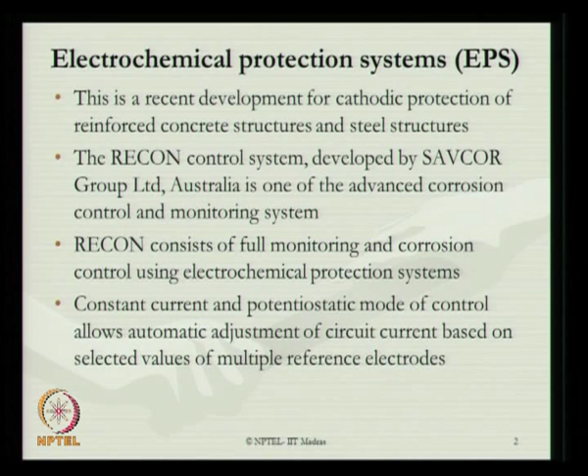In this methodology, a constant current and potentiostatic mode of control allows automatic adjustment of circuit current based on selected values of multiple reference electrodes.

EPS can also be employed for corrosion protection of new reinforced concrete structures. Chloride induced corrosion is one of the major causes of concrete deterioration in reinforced concrete structures in marine environment. EPS is a recent method found to be effective in addressing these problems, with a proactive approach to address such durability issues.

EPS components of a fresh construction shall include activated titanium anodes, monitoring probes and sensors, and high durability anode and steel connections. Now the fundamental question is: when does corrosion occur in a reinforced concrete system or in a steel structure?

In particular, when you talk about reinforced concrete structures, the reinforcement embedded in concrete is initially protected from corrosion by a passive layer formed around them. This layer is formed essentially due to the high alkaline nature of concrete. Corrosion occurs when this passive layer is destroyed or perforated.

Many surveys are to be carried out to actually assess the condition of concrete in marine environment. Following are the list of surveys which are generally carried out to assess the condition of concrete:

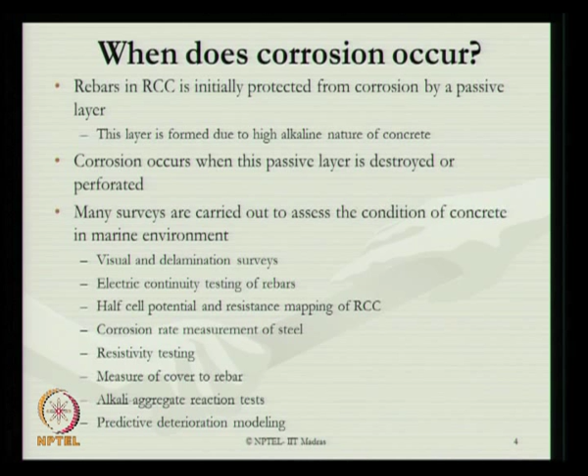Visual and delamination survey, electric continuity testing of rebars, half cell potential tests and resistance mapping of reinforced concrete structures, corrosion rate measurement of steel, resistivity testing, measurement of cover to the rebar, alkali aggregate reaction tests, and predictive deterioration modeling. These are some of the experimental and analytical tools generally carried out for assessing the condition of concrete structures in marine environment.

Now the fundamental question comes: corrosion will be activated once the passive layer is destructed or perforated. Now how to restore the natural realkalization of concrete?

New concrete has a natural inherent alkalinity, which offers passive protection to the rebar. When this passive protection is destructed or destroyed, ingression of carbon dioxide creates carbonated concrete of very low alkalinity. This results in loss of the passive layer and also accelerates corrosion of the reinforced bar in concrete.

Realkalization is one of the famous and common non-destructive methods to counteract concrete carbonation. This involves an electrochemical technique of passing a sustained low voltage current between temporary anodes on the surface of concrete over a short period of time, ranging anywhere from 3 days to 15 days, and this experiment can be repeated in a number of cycles over a given period.

A paste of cellulose fibers saturated in sodium carbonate solution is generally used as an electrolyte covering the concrete surface. As surface anodes are embedded in this alkali, the alkali is drawn into the concrete and reaches the rebars. This realkalizes the concrete in totality, and a natural protective passive layer is then formed, which offers protection against corrosion to the rebar.

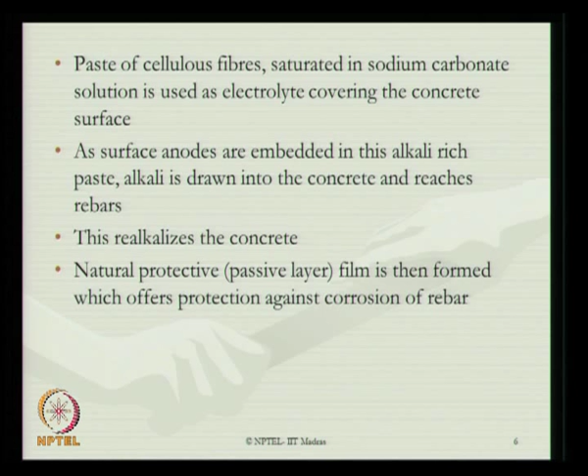Let us quickly see what is the methodology by which this can be applied. Before you apply the realkalization technique to any reinforced concrete system, the following inspections are to be carried out.

One should carry out visual inspection, depth of carbonation to be ascertained, chloride analysis test to be carried out, and cover to rebars to be assessed very carefully. One has to conduct a delamination survey to understand the integrity of concrete in situ, and should also study alkali aggregate reaction through experimental investigations before realkalization is attempted in concrete structures.

The rebar connections are installed in the concrete by connecting cables. These cables are generally black in color and are extended to a transformer rectifier circuit outside. The continuity of the rebar is to be ascertained and checked before this test is conducted.

Anode connections are then made. Red cables are connected to the anode and also extended to the same transformer rectifier unit. A reservoir is used to house the anode mesh and the alkaline electrolyte.

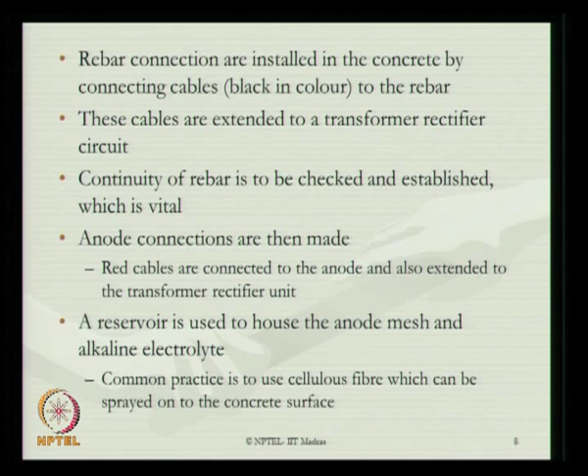The common practice is to use cellulose fiber, which can be sprayed on the concrete surface, which will act as an electrolyte medium.

Wooden battens are then fixed to the concrete surface, which act as spacers between the concrete and the anode mesh. The anode mesh is then fixed to these battens, and the cellulose fiber is sprayed on the mesh.

Regular wetting of the fiber can also be done, as an alkaline electrolyte is to be ensured. Cables from the rebar, which we call cathode, generally black in color, and the mesh, which we call anode, generally red in color, are connected respectively to the negative and positive poles of the transformer rectifier unit to supply the design current intensity.

During the test period, if required, the concrete surface can be rewetted after switching off the power, if you see the electrolyte is getting dried off because of weather conditions.

The whole arrangement is then subsequently monitored during the test period by means of current and voltage readings. The pH levels of the concrete are also periodically inspected and tested.

Cables are then disconnected after the test period is over and the concrete is cleaned with water. Now the concrete is completely realkalized and the passive layer will be formed, so that corrosion on the rebar will not occur further.

This test and procedure is to be repeated at constant intervals, maybe at a cycle of 3 to 6 months gap, depending upon the marine environment where the jetties or structures are placed.

Before we look into other kinds of systems, let us talk about rehabilitation in more detail, in terms of how to compute the reaction of corrosion time or initiation of corrosion from the equations.

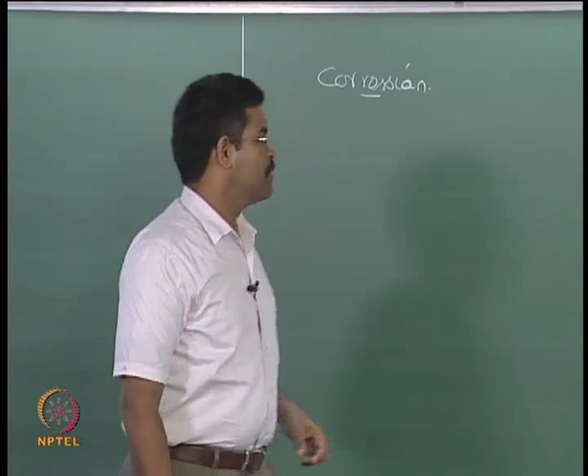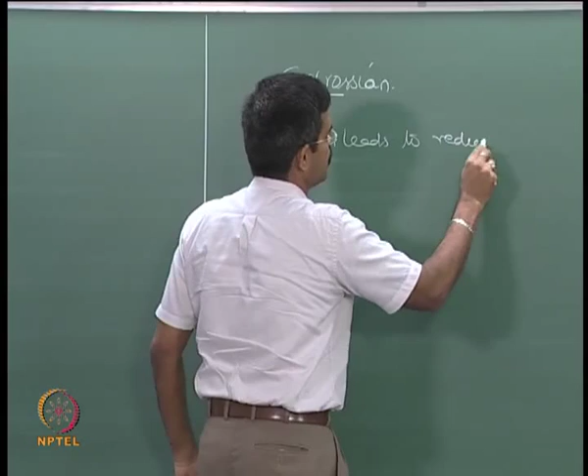So ladies and gentlemen, we will talk about corrosion as a quick process. Corrosion actually leads to reduction of cross sectional area of the rebar.

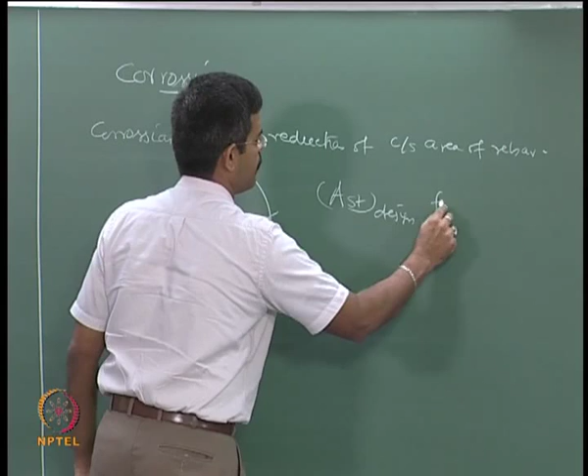For example, in the design I have got area of steel whose diameter is d, and of course I have got the design value of Ast, for example, as 2400 mm square. So depending upon the diameter of the bar, I will get n number of bars to be placed in position to take care of the design loads. It can be axial, it can be bending, etc.

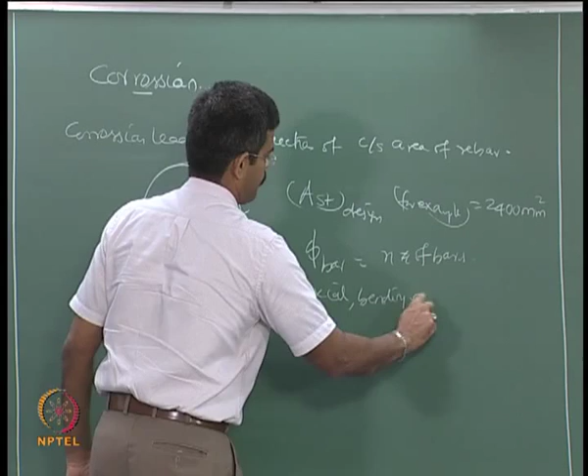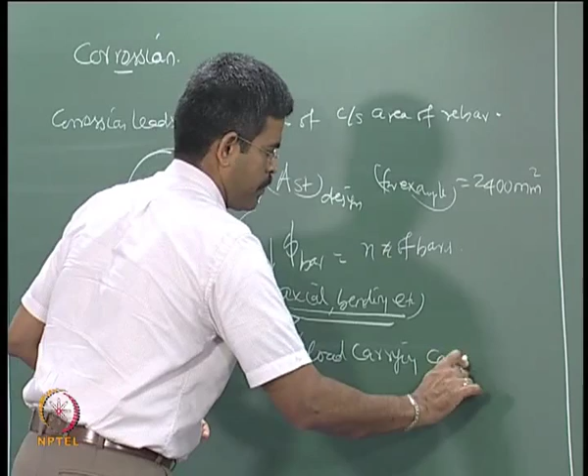On reduction of this diameter of the bar because of corrosion, there is reduction in area of steel, which will directly affect the load carrying capacity of the structure. It means the structure will be weakened, or the load carrying capacity will be reduced.

So, to improve the load carrying capacity, I have got to rehabilitate or repair or restore the member or the structure.

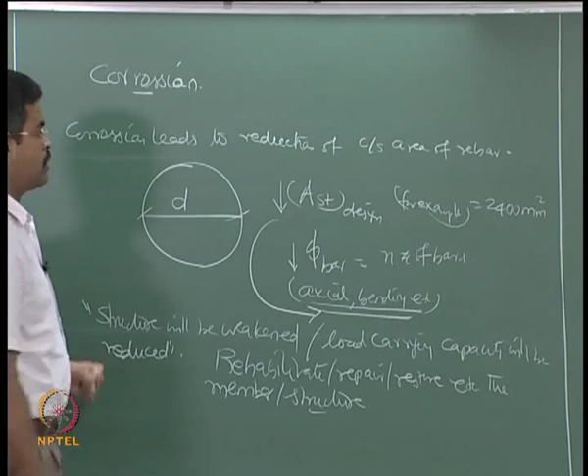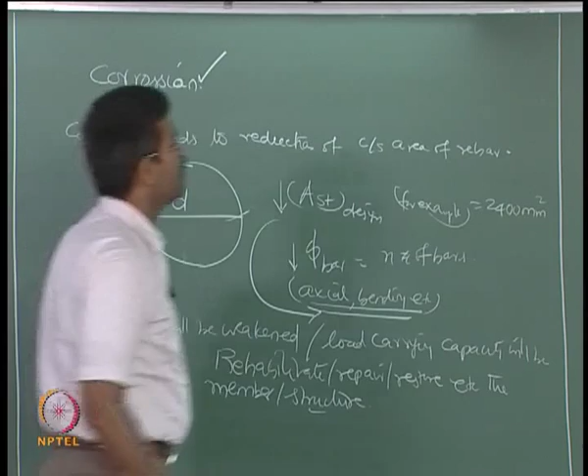Now, let us quickly understand what is the primary reason of reduction of diameter of the bar because of corrosion. If you look at the deterioration process as a whole, it depends on many factors, as you see at the bottom.

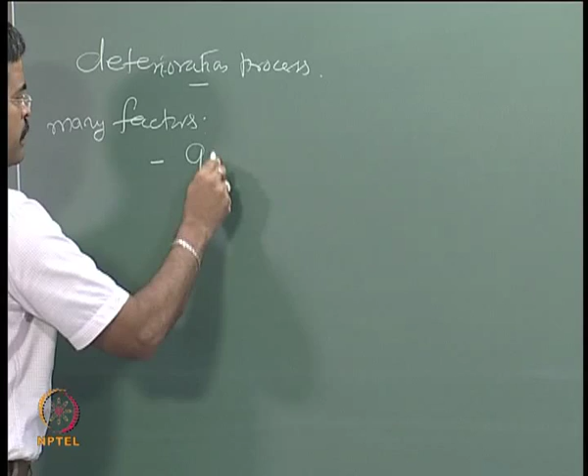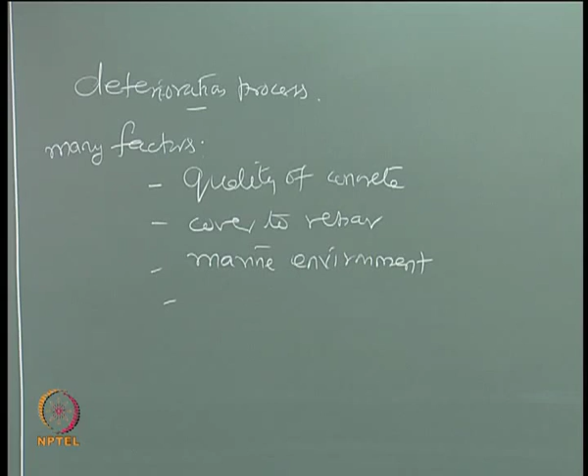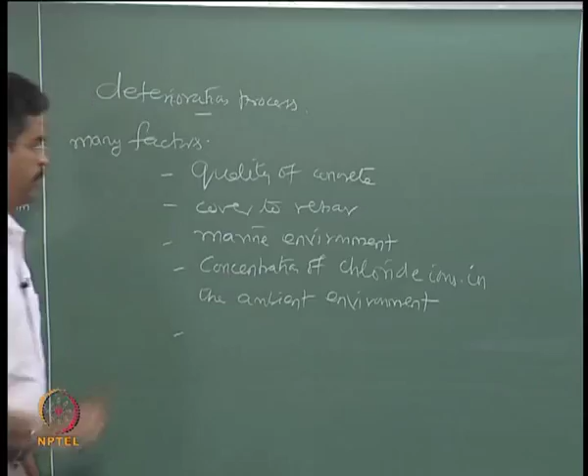These factors include quality of concrete, cover to the rebar, marine environment, concentration of chloride ions in the ambient environment, temperature and humidity, and of course the rate of corrosion of the rebar.

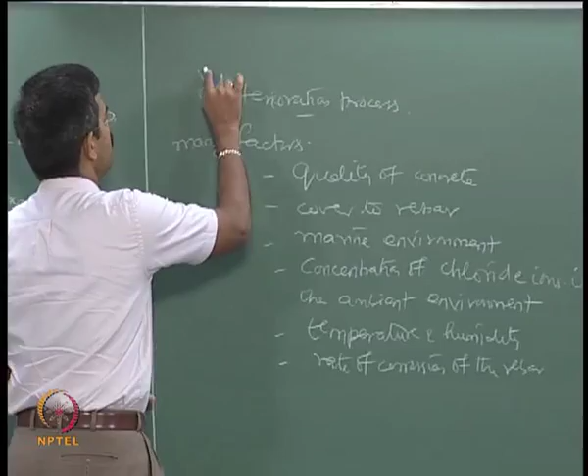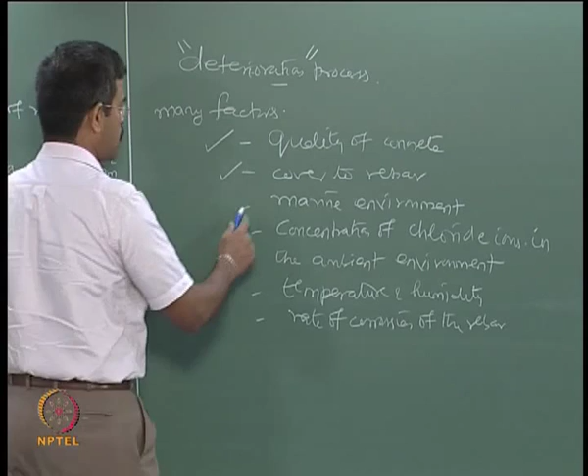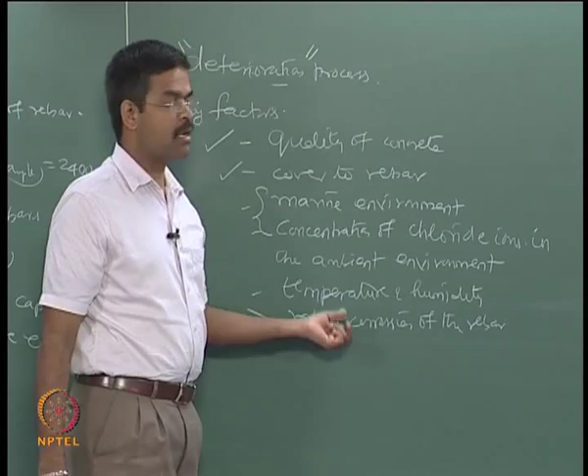Looking at all these factors which contribute to the quality deterioration of the member or structure, one can easily control the quality of concrete by proper inspection and placing of concrete. One can ensure from proper construction methodology that the cover to rebar is maintained as per design requirements, and one can address marine environment and chloride concentration through external protection methodologies. The rate of corrosion, however, becomes one of the important parameters directly related to the deterioration mechanism of the member or concrete structures.

So, let us talk about how to estimate the rate of corrosion quickly using values available in the literature.

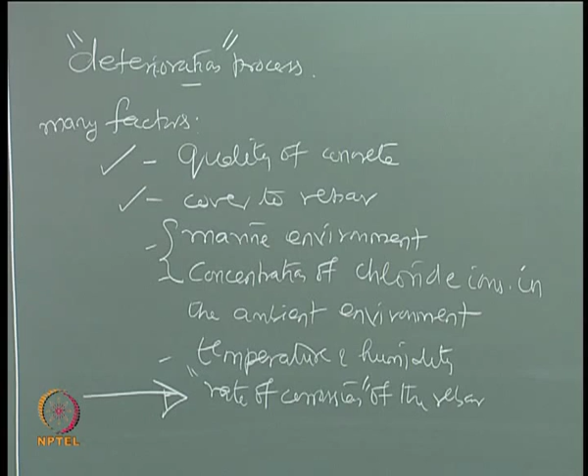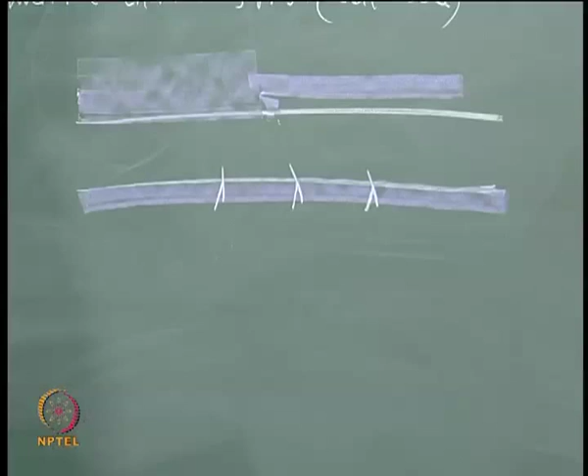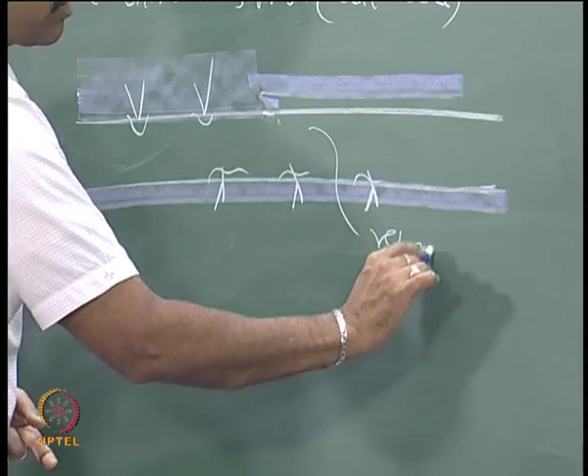As we understand, corrosion in reinforcement is essentially caused by breakage of the passive layer, which is formed when the concrete is fresh and alkaline. When this passive layer is broken or perforated, and not continuous, let's say this is my rebar and this is my passive layer. Whenever there are cracks or perforations in the passive layer because of carbon dioxide ingression etc., these are the locations where the rebar will start getting corroded. As a result, there is a net effective reduction in the diameter of the bar, which affects the load carrying capacity of the whole member.

There have been detailed studies conducted by Professor Amlan Sengupta and Professor Devdas Menon in the Civil Engineering Department, IIT Madras. I am going to give a glimpse of the approach these people carried out to estimate empirically how corrosion rate can be calculated.

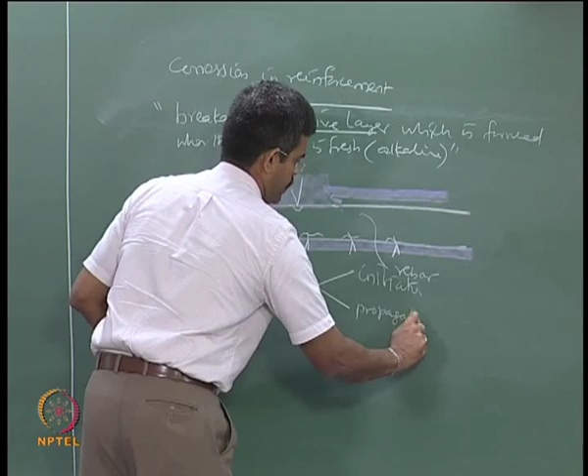Corrosion rate, or rate of corrosion, has got two processes: one is called initiation, the other is called propagation. Let us talk about corrosion initiation. Corrosion initiation depends on many parameters.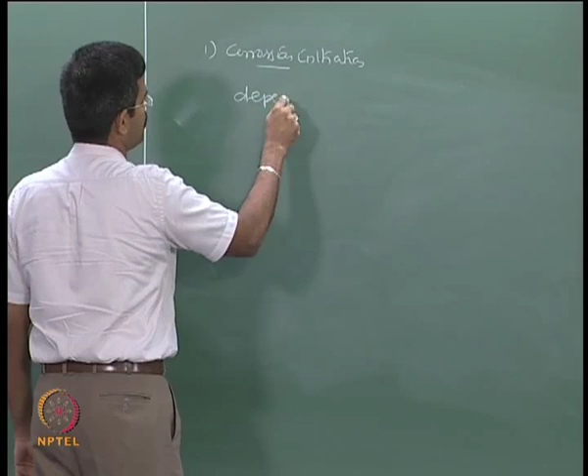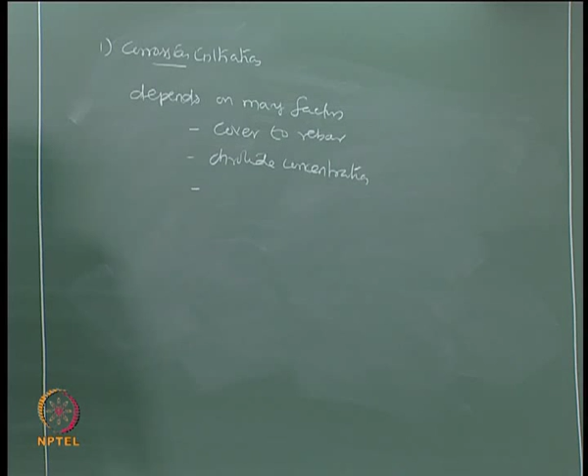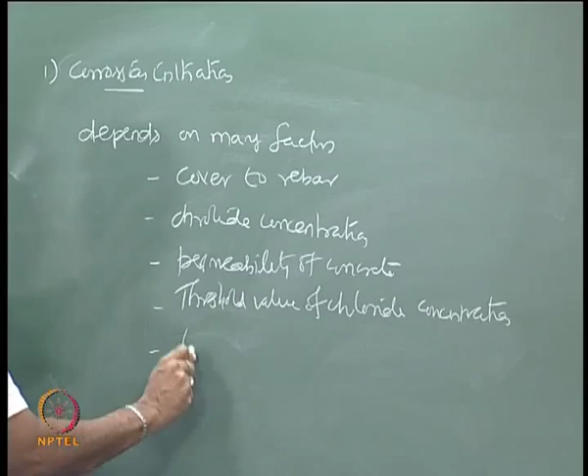These parameters include cover to rebar, chloride concentration, permeability, threshold value of chloride concentration, temperature, and relative humidity of concrete in marine environment. So there are many factors which affect or contribute to the initiation process of corrosion.

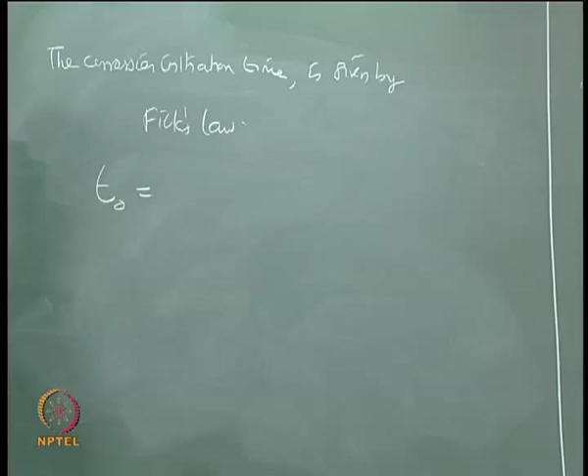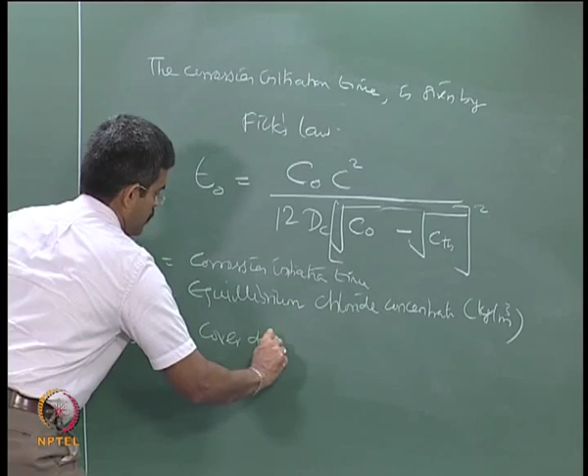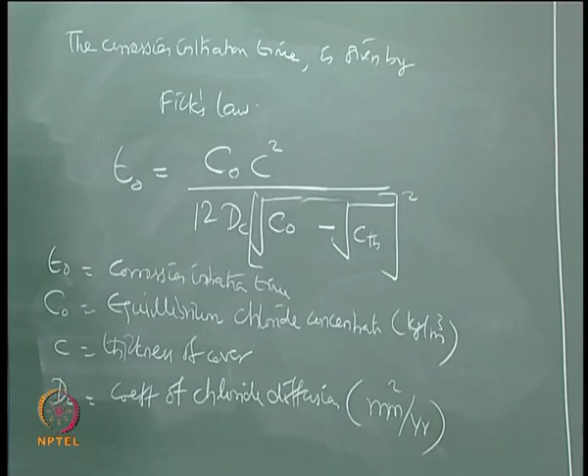The corrosion initiation time is given by Fick's law, which says T naught equals C naught, C square, 12 dc, square root of C naught minus square root of C threshold value, where T0 indicates the corrosion initiation time, C naught indicates equilibrium chloride concentration given in kg per cubic meter, C is the cover depth or thickness of cover, C is thickness of cover, Dc is the coefficient of chloride diffusion given in millimeter square per year, and Cth is the threshold value.

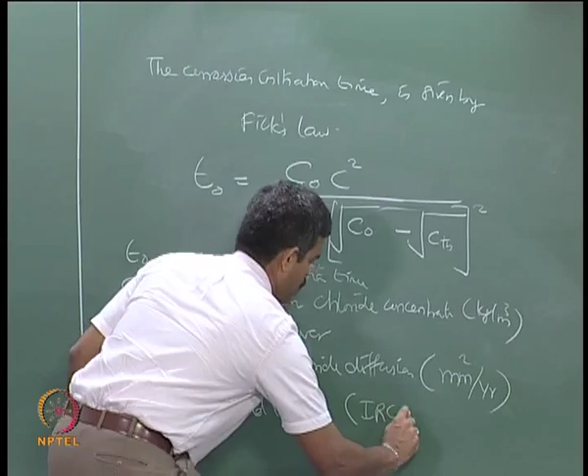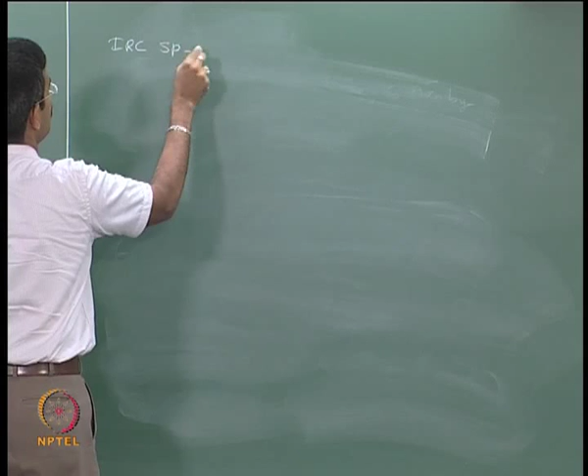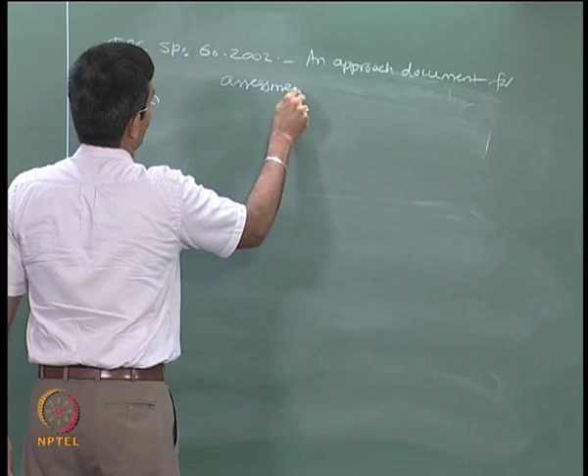The reference can be seen from IRC SP 60 2002 — it is an approach document for assessment of remaining life of concrete bridges, published by the Indian Road Congress, India.

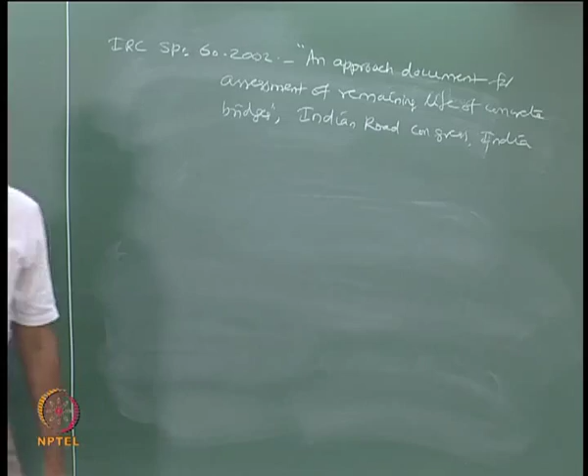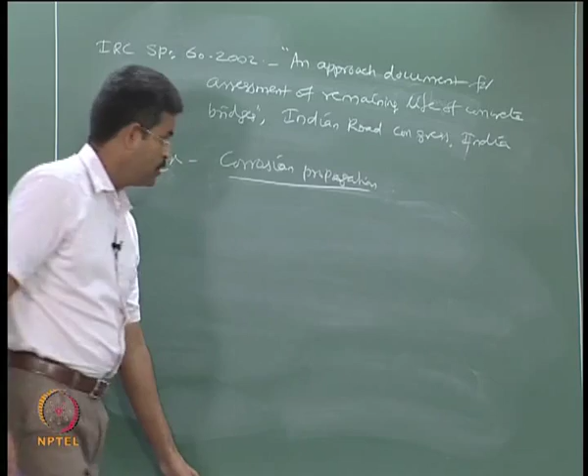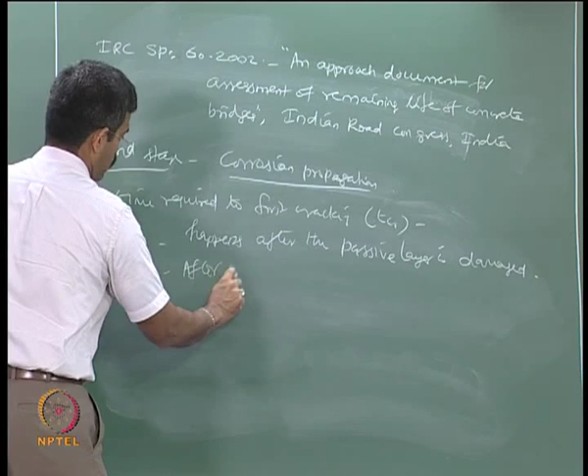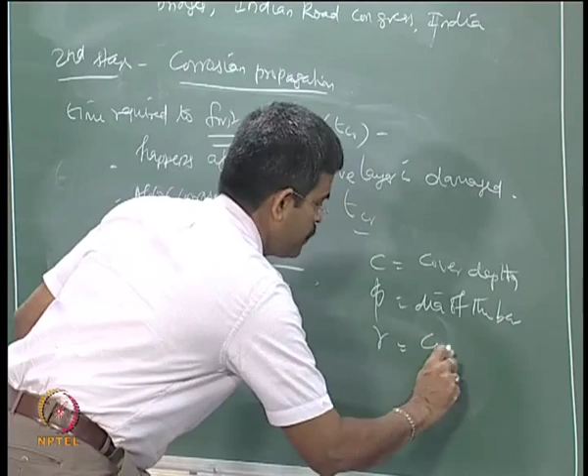The second stage is what we call corrosion propagation. The time required to first cracking, which we call TCR, generally happens after the passive layer is damaged, that is after corrosion is initiated. What would be the time at which the first crack would occur? This can be given by an equation where C is the cover depth, phi is the diameter of the bar, and R is the corrosion rate in uncracked concrete.

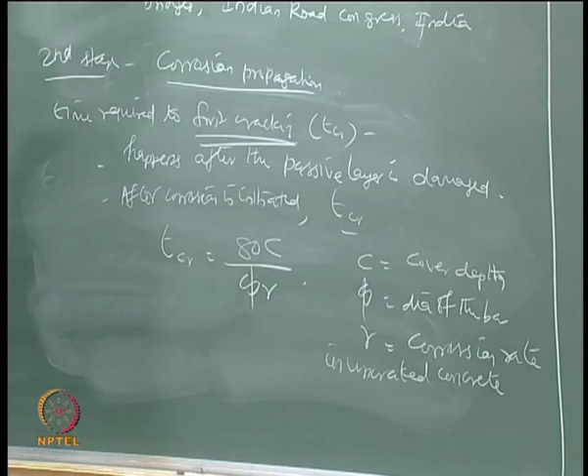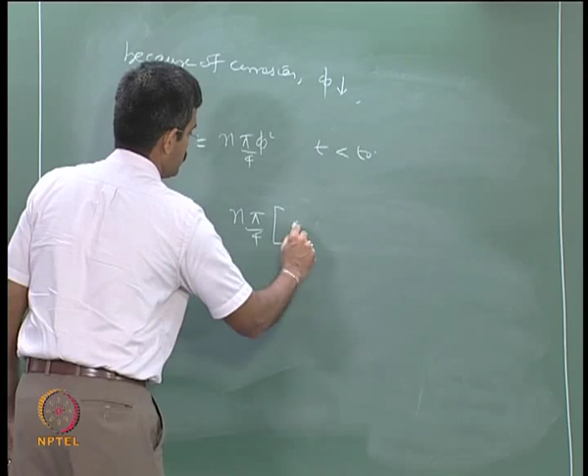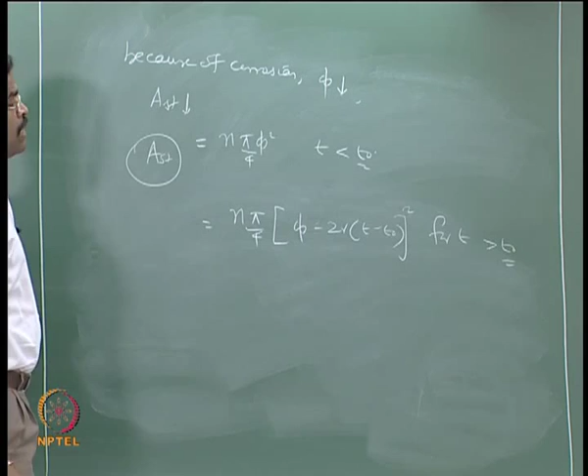So once corrosion is initiated and propagated, the diameter gets reduced and the area of steel gets reduced. There is a reduction in area of steel, or net area of steel getting reduced. This can be computed by two equations: n pi phi square by 4 when T is less than T naught, and n pi by 4 times phi minus the reduction term, the whole square, when T is greater than T naught, where T naught is already given in the equation for computing the initiation time at which corrosion will start happening. From this expression, I will be able to find the net reduction in area of steel, which will ultimately affect the load carrying capacity of the member.

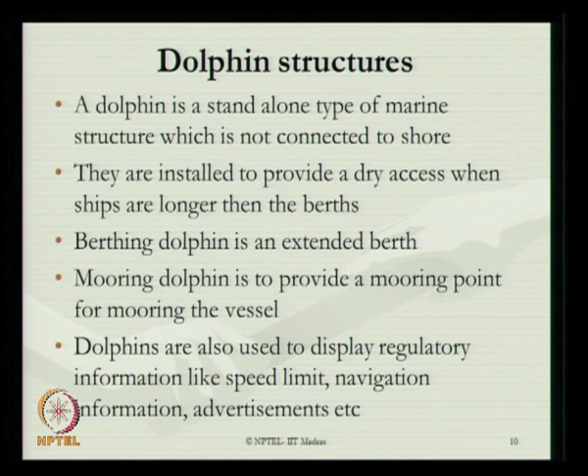Dolphins are also used to display regulatory information like speed limits, navigation information, advertisements, etc. in the seafront. Mooring dolphins can also be used as a cushion for ship impacts. They serve the purpose of a fender.

Dolphins consist of a number of piles driven into the seabed to provide a platform or a fixed point of dry access. Access to the dolphins can be either through a pedestrian bridge or usually by a boat.

Sheet piles are generally used for such construction when the soil is soft and the foundation needs to be deeper. Now, let us talk about different types of sheet piles which are used for such foundations of dolphin structures, where the soil is soft and the foundation has got to be deeper.

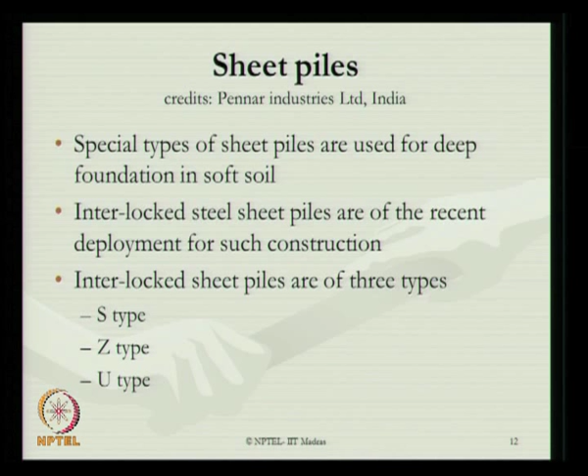Sheet piles are special types used for deep foundation in soft soil. There are interlocked steel sheet piles which are generally available, one of the recent deployments in such construction. Interlocked sheet piles essentially are of three types: S type, Z type and U type.

For example, depending upon the configuration, U stands for U type piles, U type sheet piles, with different numbers or configurations assessed along with specific dimensions of breadth, height and thickness. Of course, for a suitable chosen configuration of a sheet pile of U type shape, there are other properties available readily from the manufacturer.

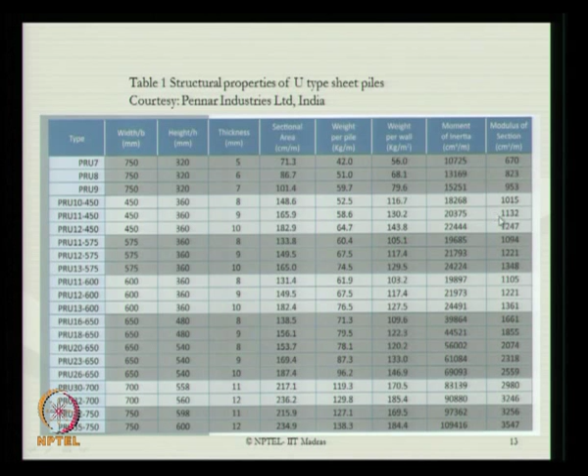These include sectional area, weight per pile per run in meter, and weight per wall per square meter area, and of course the moment of inertia and modulus of section, which are available per meter run or per meter length of the piles.

The second type of pile is the Z type sheet pile. Again the variables of breadth, height and thickness, and the structural characteristics of this kind, are available for different configurations as given by the manufacturer.

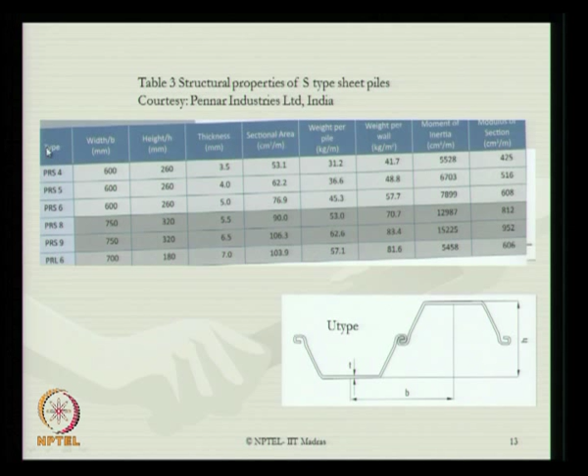We also have these properties available for S type sheet piles, for different configurations and different structural characteristics, as given by the manufacturer.

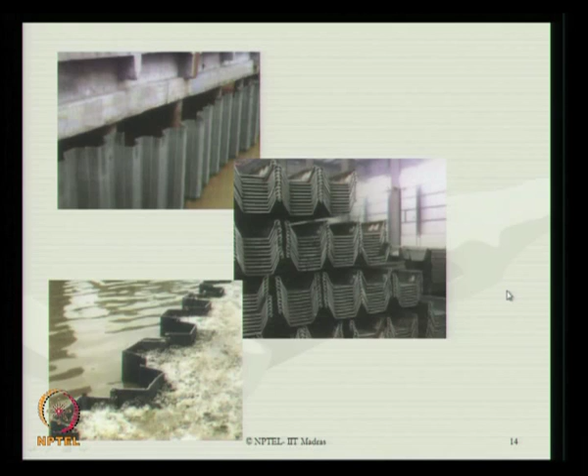The second application we want to discuss, also very interesting, is a replacing member in offshore structures: fenders. A fender is actually a bumper used to absorb the kinetic energy of a boat or vessel that is berthed against a jetty or a quay wall.

Fenders are used essentially to prevent damage to boats, vessels and berthing structures. Fenders are manufactured essentially out of rubber, foam, elastomers or plastic. Usually rubber is a very common material used for manufacturing fenders.

The type of fender most suitable for an application depends on the dimensions and displacement of the vessel to be berthed, the maximum allowable standoff, and tidal variation at the specific site. The size of the fender unit is based on the berthing energy of the vessel, which is related to the square of the berthing velocity.

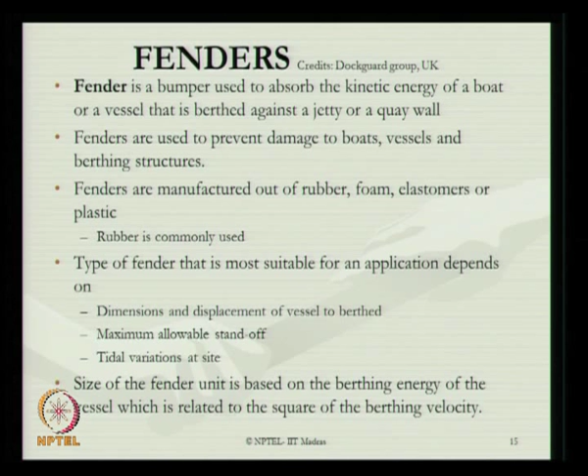There are different types of fenders manufactured by different manufacturers in the world: leg fenders, cone fenders, cell fenders, arch fenders, cylindrical fenders, extruded fenders and poly rub buffers.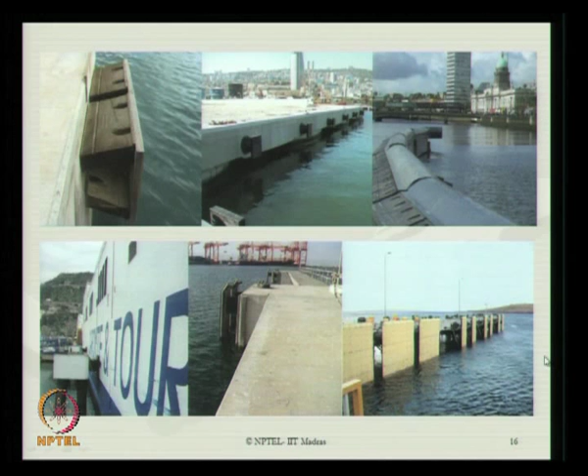There are some classical examples of different types of fenders used around the world. You can see the berthing structure where fenders are attached to the berthing element in Norway. Cylindrical type fenders are used in Russia for a vessel.

There are different kinds of fenders being used in UK, in Norway, again in UK, in UAE, and of course in Italy.

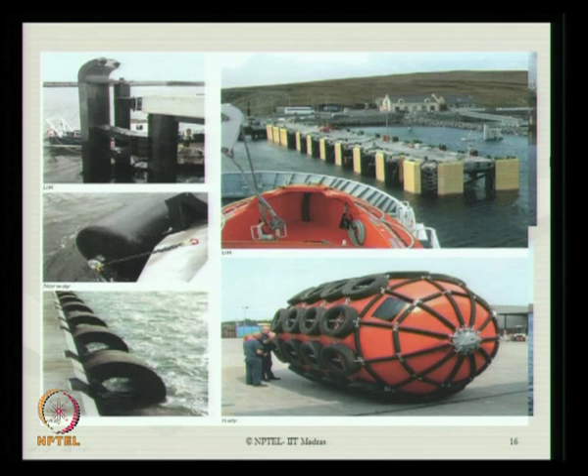Fenders are available in different dimensions and sizes. They are generally provided at intermittent spacing, or sometimes continuously, in different shapes. The material used is essentially either elastomers or rubber.

Amongst the types of fenders used for berthing structures in offshore facilities, leg fenders are more common. They are molded in a rhomboid shape to optimize energy absorption. Twin notches are provided on the side of the fender to ensure uniform compression under applied forces, and they can be mounted either horizontally or vertically on a quay wall.

The normal compression is about 58%, and the maximum compression is about 65% of the fender's height. The height of these fenders varies from 150 millimeters to 1600 millimeters, and the length varies from 750 millimeters to 3 meters.

This type of fender has very high energy absorption in proportion to the weight of rubber used. They allow small footprints and are very compact in size, and are resistant to ultraviolet radiation and waterborne pollution, finding common application in most berthing structures.

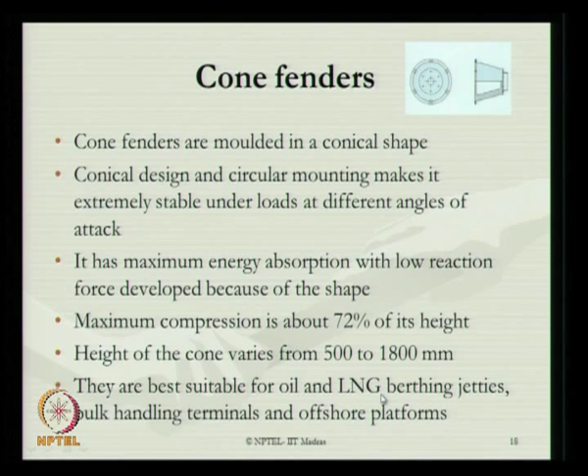It has maximum energy absorption with low reaction force developed because of this shape. The maximum compression of these fenders is about 72% of its height. The height of the cone varies from 500 to 1800 millimeters, that is, this dimension varies from 500 millimeters to 1.8 meters. These fenders are best suited for oil and LNG berthing jetties, bulk handling terminals, and offshore platforms.

Arch fenders are also molded with different compounds to alter their behavioral characteristics. They are manufactured using twin leg systems and can be mounted horizontally or vertically on a quay wall. The front face has a high friction factor, which is a major advantage, and is ideally suitable for berthing small vessels.

The normal compression of these fenders varies up to about 52% of its height, with a maximum of about 55%. The height of the fender varies from 150 millimeters to about 1 meter.

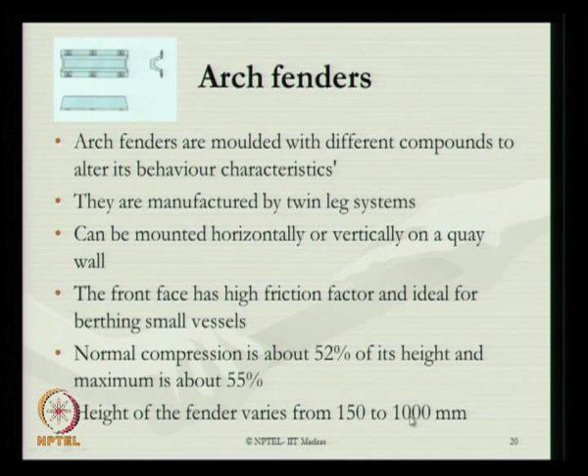So in this lecture we have summarized different kinds of dolphin structures, different types of sheet piles, and different varieties of fenders, all used for repair and rehabilitation of offshore structures. We also discussed different methodologies and techniques for estimating corrosion propagation and initiation parameters, which are essentially responsible for corrosion of rebars present in reinforced concrete structures.

So all the modules put together, module 1, module 2, module 3 and module 4, will help you understand very briefly the course on ocean structures and materials.